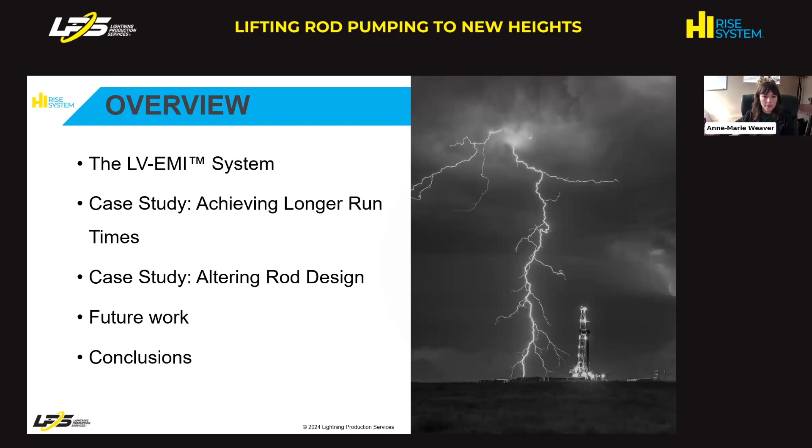Okay, so getting into the low voltage EMI technology. As most of you are familiar, electromagnetic testing is a form of non-destructive testing involving the induction of either electric currents, magnetic fields, or a combination of both. And so when a test is executed properly, a defect inside of the test object will generate a detectable response.

So just a little bit about the operations. When we're scanning a continuous rod string, the rod will travel through the injector before entering the guide arms. And prior to entering the guide arms, we have rubber strippers that we use to eliminate excess oil and paraffin on the rod string. And that ensures that the scan occurs with optimal conditions. So we're mitigating any potential data interference.

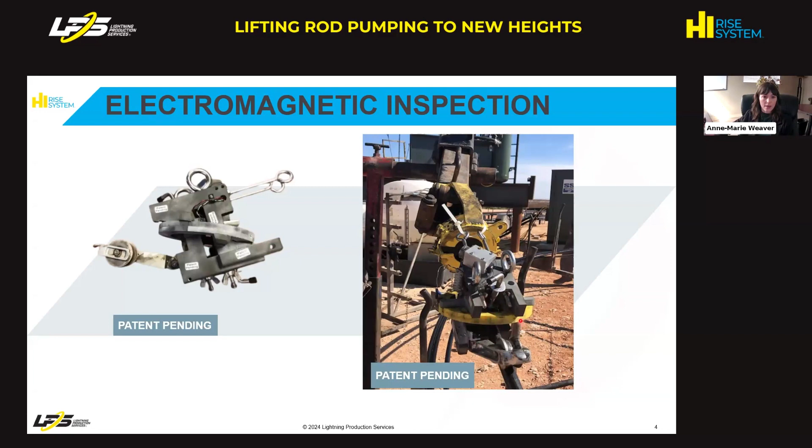The rod will then travel through the guide arms, an additional set of rubber strippers before entering the EMI unit and then the collapsible service reel where it continues to spool. So just a little bit more about the unit. Our unit measures magnetic flux leakage and magnetic flux density.

So magnetic flux leakage, or MFL, will detect your corrosion pitting or three-dimensional discontinuities. And then magnetic flux density will detect your cross-sectional loss, your wear, changes in permeability of the rod string. So it'd be able to detect a weld, which is something you see in continuous rod a lot.

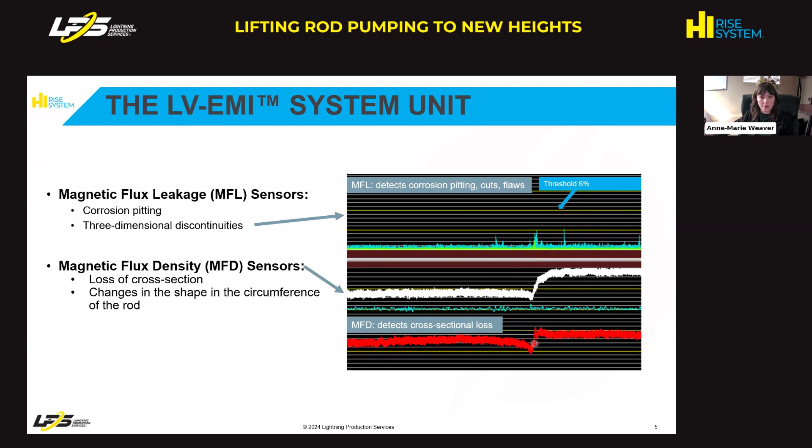So a bit more about the unit. The unit detects variations in the magnetic field with the magnets installed in the housing. Material imperfections, as well as relative motion between the rod string and the apparatus while scanning the rod out of the wellbore, may both result in those variations. And so variations caused by imperfections are defined as signals, while variations caused by relative motion are defined as noise.

And so we want to be able to eliminate that signal noise resulting from the relative movement between the string and the sensors. And so to do that, we added an accelerometer to the unit. And that accelerometer is this blue line that you see right here.

So speed is controlled by the operator. I'm sure if you're familiar with EMI, you probably know this, but the slower you run the rod through the EMI unit, the harder it is to read the magnetic field that's generated from the sensors. So it limits the amplification required to see the spikes on the graph. The faster you run the rod through the scanning unit from the Hall effect and the search coils, it results in magnified peaks from the discontinuities in the rod string.

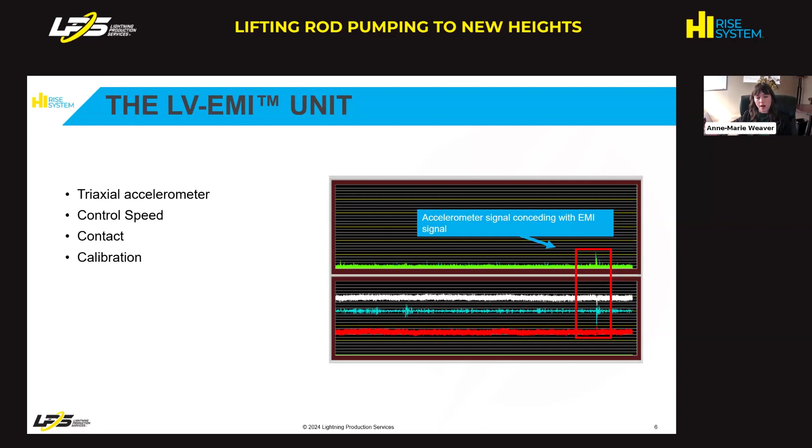Calibration: we calibrate before every job with coupons, to ensure that the unit is ready for inspection when we go to scan your continuous rod string. One other thing that I just wanted to mention is we're adapting this technology for coil tubing, which we'll discuss at the end, as well as production tubing, but we can scan 4 inches within an upset, which is different than the traditional EMI unit.

So before we get into one of the case studies, I really want to discuss rod fatigue because it's very applicable to the case study that we'll be discussing. This was a common indication that we were observing initially when we started using this technology, but didn't quite have a name for it. Through our EMI scans, we found these fluctuations near areas where the rod string would part. And the fluctuations detected are associated with hardness variations in the rod string.

As I mentioned a few slides ago, we can detect the changes in the permeability of the rod string. These variations can alter the magnetic permeability properties of the rod string, contributing to fatigue. The fluctuations result from repetitive stretching and compression that the rod undergoes over time during its operational cycles. It's similar to bending a paperclip over and over again until it breaks. The severity of these fluctuations varies depending on factors such as how fast the operator is running the unit and the degree of deviation in the operational condition. So maybe how severe the deviation is, but also if there's a multitude of severe deviations, that's where we see a lot of the problems.

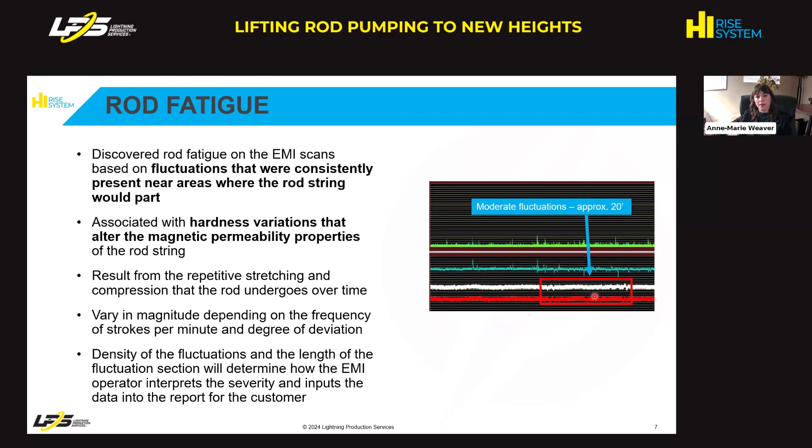So I'm going to explain the thresholds and our reporting system, so you can understand the case studies. Continuous rod is not API. So to come up with our thresholds of what we recommend our customers remove when we're scanning these rod strings, we loosely based it on API 11BR. You can see that on the left here. Any crack shall be cause for rejection. Mechanical damage that leaves sharp indications on the rod body is rejected. Loss of cross-sectional area due to corrosion, wear, or defects, so those three-dimensional discontinuities greater than 20 thousandths, would be downgraded to a class 2 rod or rejected.

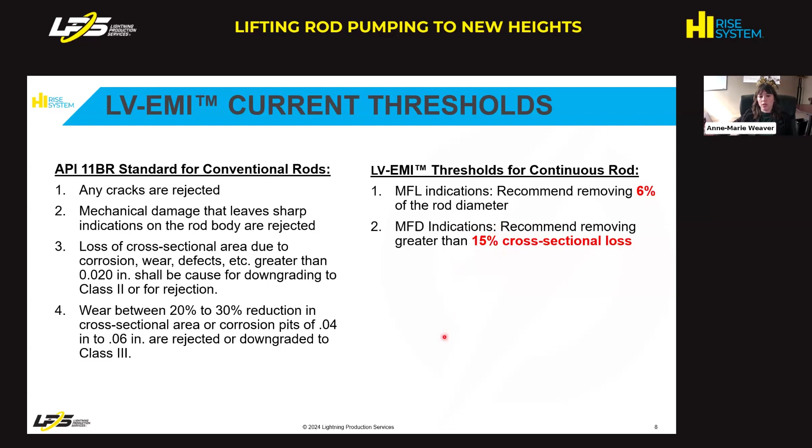And then wear between 20 to 30% reduction in cross-sectional area or corrosion pits of 40 to 60 thousandths are rejected or downgraded to a class 3 rod. So based on this, we've come to these thresholds here. So our magnetic flux leakage indications, so again, corrosion pitting, three-dimensional discontinuities, we recommend removing greater than 6% of the rod diameter. So that percentage is based on the rod diameter. And then magnetic flux density indications, we recommend removing greater than 15% cross-sectional area loss.

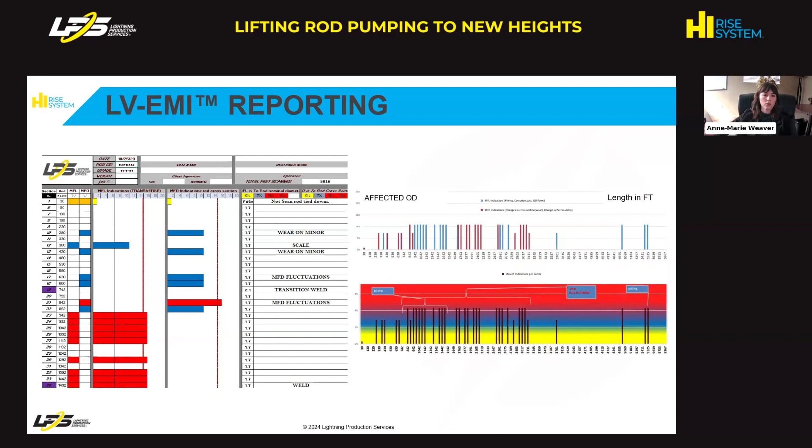So now that you guys have an understanding of the reporting, I'm going to go into the first case study. So this is just a couple wells from a case study that we're going to be presenting in April at the short course. And there'll be more wells that we present on at the short course, but just wanted to give a little quick preview of it. So for this operator, they utilize continuous rod to address challenges of loading conditions at deep pump depths with high fluid rates, along with casing restrictions. So mainly using long stroke units, and with continuous rod, you have the advantage of running 1 1/8 continuous rod in a smaller tubing size, so 2 7/8 tubing. You wouldn't be able to do that with conventional stick rod, and therefore you can make more fluid with continuous rod. And they have a widespread continuous rod population, and a lot of these strings are older than 10 years.

And so they've scanned a lot of rod strings with us over the last 2 years, over 115 rod strings. And with that information so far, their criteria has come to the following. So they scan any high failure rate wells, so any wells that meet whatever their standard is for high failure rate. And then any well that is a cause-related scan. So basically any wells where the cause of failure is related to the rod string, they'll also scan the rod string at that time.

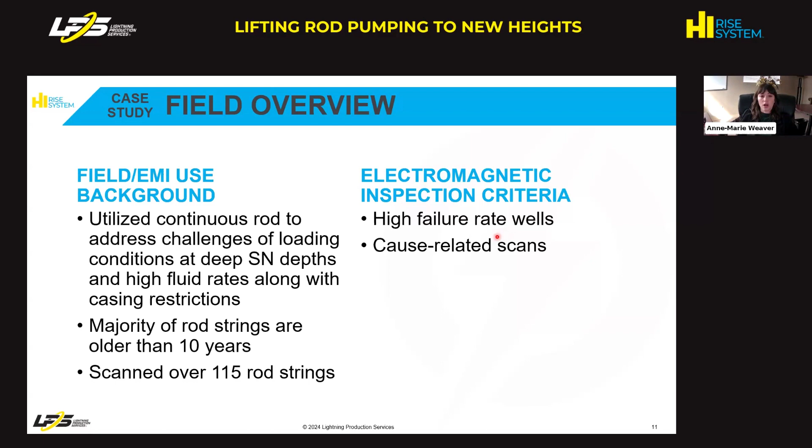So on these next 4 slides, you're going to see 2 magnetic flux leakage graphs and 2 magnetic flux density graphs for 2 separate rod strings on 2 different wells. And so here, the y-axis is your defect severity in terms of percentage, and then we have the footage of the rod string on the x-axis. So in this first one, we're looking at magnetic flux leakage, which is corrosion pitting again, and three-dimensional discontinuities. So yellow is up to about 6%, and then blue will go up to 14, and anything past that is red. So that's kind of how the color coding works.

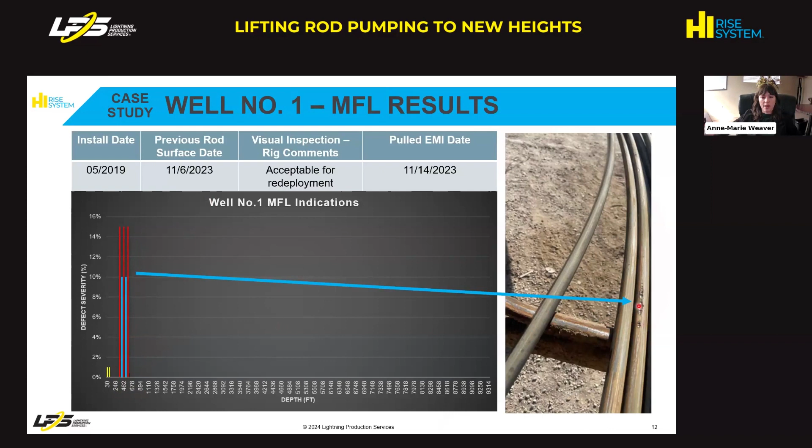And this particular well was installed in May of 2019, and the operator pulled it on November 6, 2023 for elective well work. And the crew noted that the rod string had light pitting and wear, but it was fine to run back in. And after running for only 1 week after the elective well work, the operator had a rod failure. And at that time, they decided to EMI the rod string and came to the conclusion based on the EMI scan that there was severe pitting in the top 650 feet of the rod string. And you'll see on the next slide, it also had some moderate wear on the bottom. So you can see a picture here of the pitting on the top portion of the rod string.

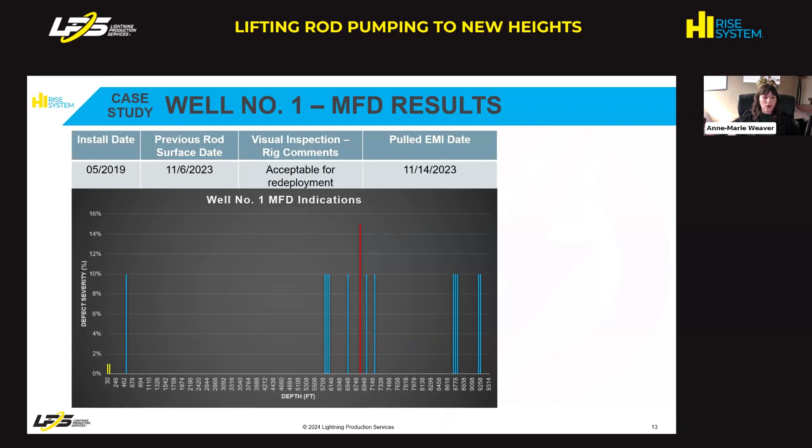But had they been able to maybe scan it when they were doing the elective well work, they likely could have prevented a repeat rod failure that they ended up seeing on this particular rod string.

Well number 2. So this co-rod parted at 950 feet. Both of these wells, semi-elliptical rod strings, should have mentioned that at the beginning, but this was in the number 6 taper. And at the time of failure, you can see here, it is an older rod string installed in April of 2013.

And at the time of failure, when it did part at 950 feet, the crew noted light pitting, but only needed to cut and replace about 60 feet above and below the failure, and that the remainder of the rod string was in good condition and could be rerun back in the well bore.

The well ended up failing for another rod part just a little over 2 months later, and so the operator decided to EMI the rod string at this time. And the failure was actually near the transition between the 6 and 7 taper. But as you can see by the EMI results, the rod string was highly compromised throughout.

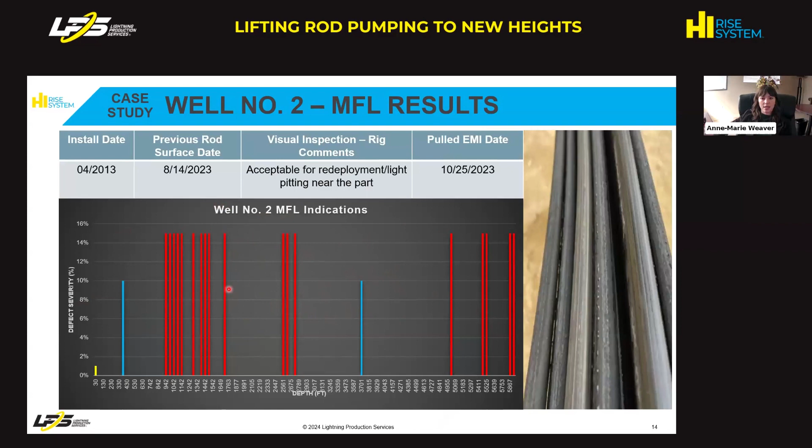So in this case, this is magnetic flux leakage. So again, corrosion pitting, three-dimensional discontinuities. And in this case, these indications were representative of pitting throughout the rod string. And they also had pretty moderate to severe wear in the top about half of the rod string.

And so it was installed in April of 2013, and they decided to retire the rod string at this time. And so these 2 wells are just a good example of how scanning continuous rod during a workover can help prevent repeat rod failures. Maybe had they scanned it at the initial, they could have prevented the second failure by removing that 650 feet initially, or replacing this rod string at the prior time when they pulled it in August of 2023.

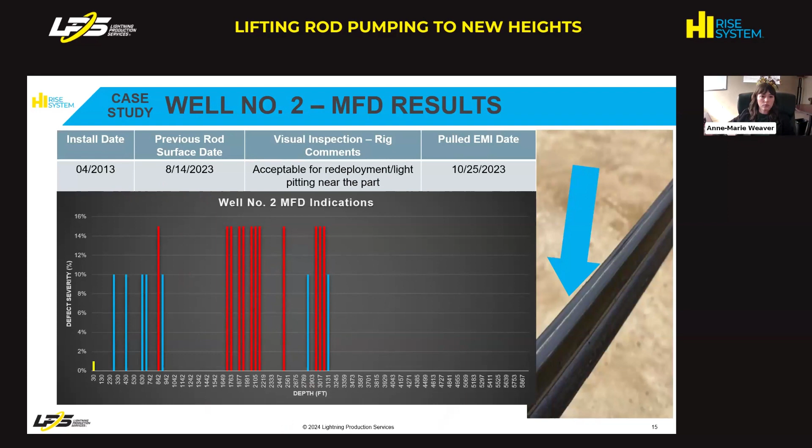Okay, so getting into the next case study here. So this one is based on altering rod design. This was done in the Permian Basin with another operator. And I'm going to give you a little brief summary of what happened on this well. There's a lot of moving parts, but as I go through the study, it'll probably be easier to follow.

So we initially installed a new rod string with this operator in December of 2021, consisting of an 8/7/8 taper, so a 1-inch, 7/8, 1-inch. This is round continuous rod. They had a 1 3/4 tubing pump because they were using some 2 7/8 lined tubing in a couple problematic areas. It was making around 300 barrels of fluid per day, and I think they were running around 6 strokes per minute.

And then it ran for only 70 days. In March of 2022, they had to pull the rod string due to a part at 2860 in the 7/8 inch section. And so at this time, based on the scan, which you're going to see on the next 2 slides, we recommended replacing 500 feet in the 7/8 inch section. So it's about 400 feet above the part and then 100 feet beneath the part based on the scan.

And so we reran the string, but for some reason there was a miscommunication in the field and only 400 feet was cut out. So the 100 feet beneath the part was not removed. And so they reran the string with that 400 foot new section, and the rod string parted again 20 days later, about 20 feet beneath the original part. So the first failure was at 2860, as you can see here, and the second failure was at 2880.

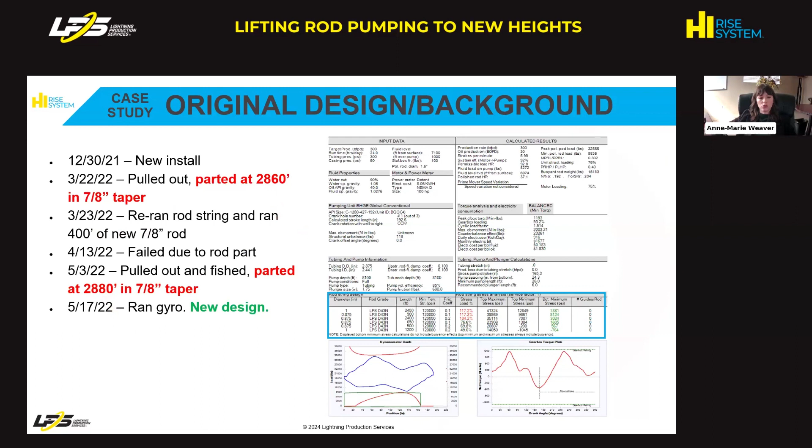So really close. And so in May, based on the two failures and the severity of the MFD indications, which you'll see in a couple slides, after really short run times, we did recommend running a gyro. And so I'm going to show you the gyro and the MWD overlaid, as well as the gyro with the MFD indications for the March and the May scans. And then we'll get to the new string that we designed and the new run times.

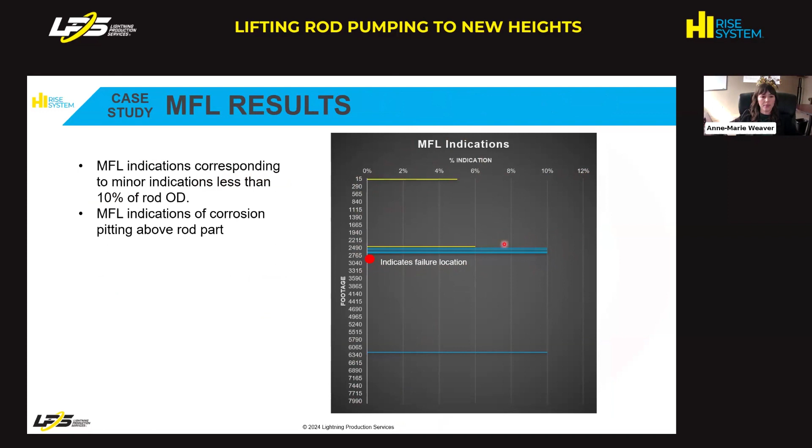We have our failure location right here, and there was some corrosion pitting right above the failure. And then for our magnetic flux density, you can see we have pretty significant indications for a 70-day runtime. And so there were some MFD fluctuations right above the rod part, and you can't actually scan the rod part, but you can see there were some MFD fluctuations right above the part.

Failure location right here also had some rod wear at the bottom of the rod string. And this was after a really short runtime. And so again, based on the scan, we recommended cutting out 500 feet, but there was a miscommunication and 400 feet was replaced. And so that rod part was found 20 feet beneath the initial part.

So in the May scan, we went ahead and scanned the rod string again. It looked pretty similar to what you see here. There were a few more indications on the bottom, which you'll see when I overlay it with the gyro. But we did also send the rod failures off, and the root cause of failure was basically shown to be from compression buckling, and we can attribute that to pushing through severe deviation. And so we did recommend running a gyro.

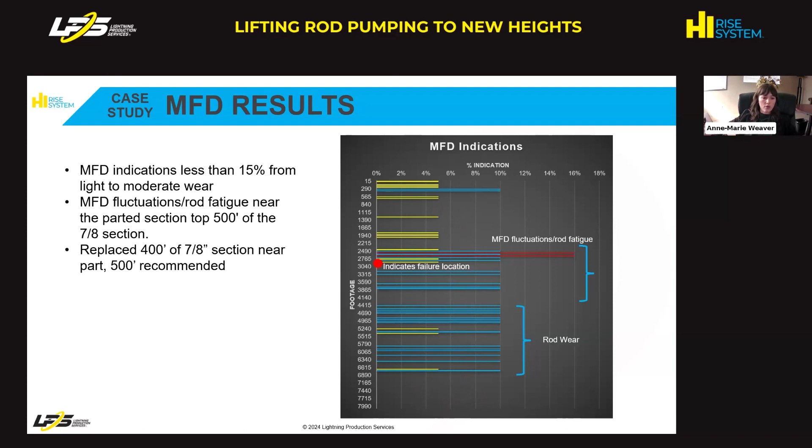So this here is the gyro overlaid with the MWD. So this gyro is a 25-foot interval in-tubing gyro. The left here is dogleg severity. Right here is our side loading. The orange is the gyro. Blue is the MWD. And you can see the MWD, it's a little bit harder to see since it's underneath, but the average throughout was about 1 degree beneath 2,500 feet.

You can see the deviation was significantly worse. There, you do have some significant deviation directly above the pump, as well as the shallow deviation where you're above 3 to 4 degrees. And when you're making 300 barrels of fluid per day at close to 7 strokes per minute, it is difficult to push through that deviation on rod pumps successfully. And so that's why we were seeing such severe MFD fluctuations after such a short runtime.

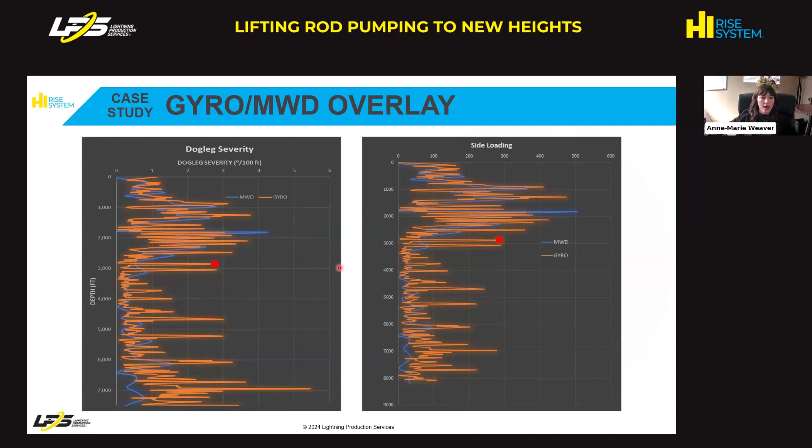And then this is our May scan with our MFD indications. You'll notice you don't have any MFD fluctuations right above the part where we were seeing it, and that's because we just replaced that rod string with new rod. And so that's why we don't see it on this particular scan. There are a few more indications down low after running for 20 more days.

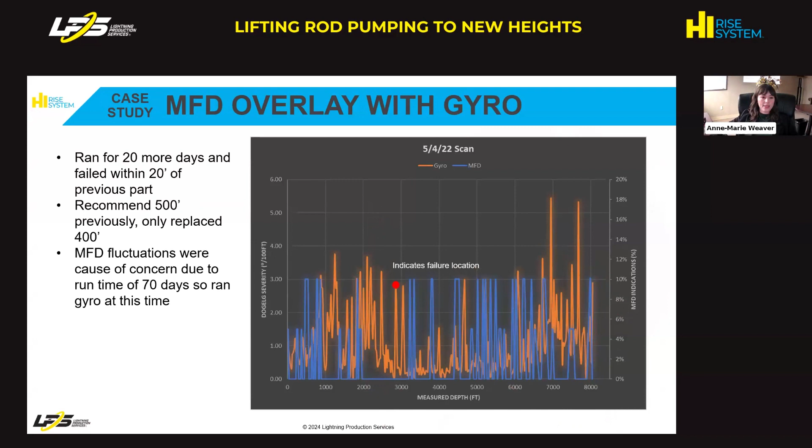And so based on these MFD fluctuations we were seeing, and then they ended up running the gyro, we found that one of the best ways, and we've done this in quite a few other wells in the Permian Basin, to push through wells with pretty significant doglegs, and it's not necessarily how significant those doglegs are, but also how many deviations there are, like the multitude of deviations that you saw throughout the entire wellbore, is to beef up the rod string.

And so we ended up running in a 9/8/7/8 taper. And so in that top section where we were seeing such significant fluctuations, we ran in 1-1/8 and 1-inch rod in the most severe deviated spots. And about everything else was kept the same.

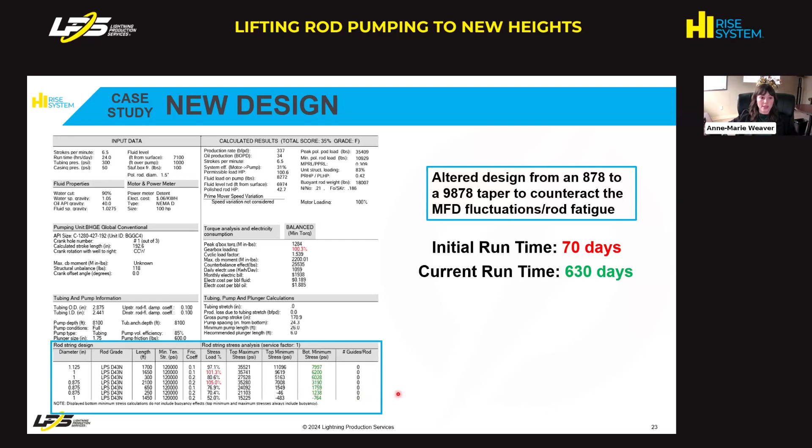So after an initial runtime of 70 days, this rod string now has been running for over 630 days. So we'll be coming up in May on 2 years. So it's really been a good success story of how applying these EMI scans to help alter the rod strings based on the fluctuations from a multitude of deviations has helped increase run times.

So our current and our future work. So currently, we've commercialized this unit, scanning for over 2 years on both round and elliptical continuous rod. And we have documented case studies. Again, we'll be presenting in April at the short course on that first case study that I showed you a couple wells on. And then in 2024, to be commercialized, we plan to roll out our new Zephyr software and data logger at the end of Q1 of this quarter.

We're adapting the unit for coiled tubing in the second half of this year. So it's going to be a similar method or operation to continuous rod. And then lastly, we do plan to begin prototyping for rack mounted tubing scanning at the well site with this technology and software and data logger as well.

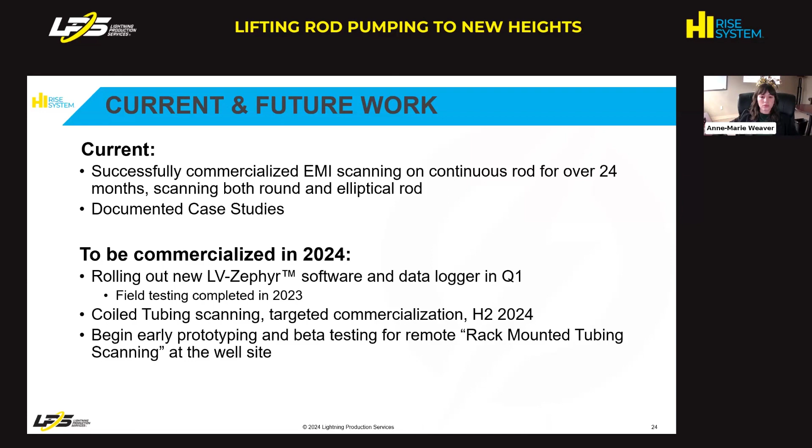And so conclusion, so based on this presentation today and the 2 case studies I presented, because a historical challenge to widespread adoption of continuous rod is repeat rod failures, we can come to the following conclusions: that this EMI unit allows operators to detect and address issues such as corrosion, wear, fatigue. It allows operators to alter operations in wellbores such as chemical programs, allows operators to alter your rod designs based on the type of indication that you're seeing, so like the MFD fluctuations.

And the integration of the technology alongside visual inspections leads to proactive maintenance and reduced repeat rod failures, helping you with substantial cost savings.